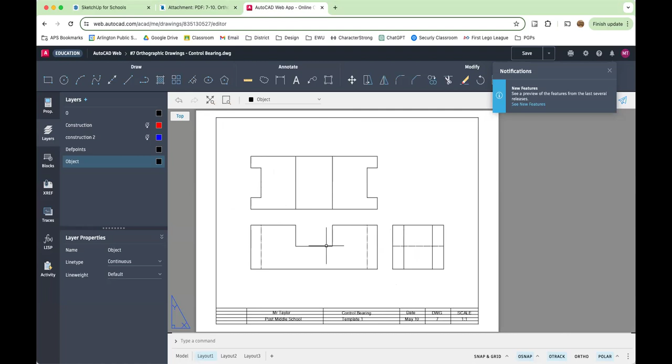We're going to do this together. Go back to our drawing template. Open it up. I would make sure you turn on all the lights to all of your views. And if you need to delete any lines in the middle, you go ahead and you do that. Mine's kind of offset here. I'm going to click on the zoom extents, and it's going to zoom me in where I can see what's going on. All right, we're going to draw the 3 views: front view, top view, and our right side. Let's start by going into our construction layer.

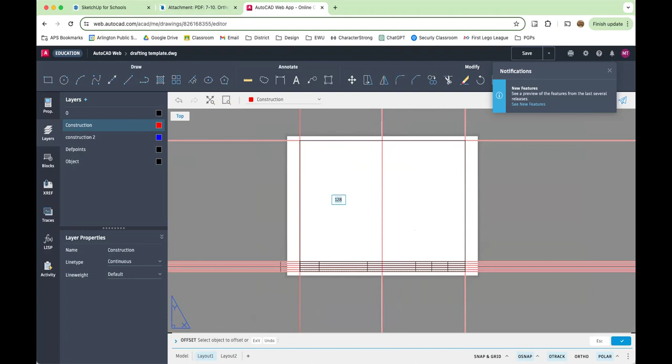The total width of our drawing is 44 plus 44 plus 40. That's 88 plus 40, which is 128. So 128 wide. Just to start with, I'm going to offset 128 distance this line this way. And that is the width. Now, we need to have a little space in between our 2 views, and I'm going to just pick an arbitrary number like 15. Let's just go ahead and click on this, move it to the right, and I'm going to type in 15 and enter, and that's going to give me a little space here.

To draw the right side view, the width of my drawing is 50. I'm going to click here. I'm still in offset. If you're not, you can retype your command. In my blue box, I'll just start typing. Don't click in the box, just start typing 50. So I got 50 wide. So our left side's going here. Here's our front and our top view, sorry, are going here. I have my little space. And then here's for my last view, the right side.

We want to get this centered right off the bat. Let's see what this distance is here. We're going to divide it by 2. We're going to move our lines over that distance. I'm going to use this to see where I'm at. Here to here is 64. Half of 64 is 32. So let's draw one more X line right here. And I'm going to clear my commands. Click on this line and select all of these lines.

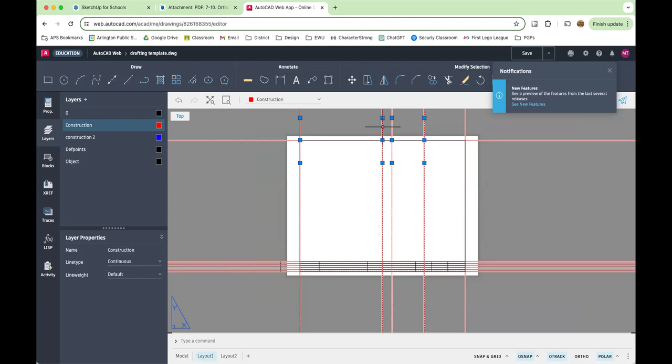Now I'm going to move. It says specify base point at the bottom. Let's just start here, and we're going to move across 32. So as we're moving across, let's type in 32. I will move those lines across. And now I have a space for my front and my top and my right side. And this is equidistant on both sides. So this is balanced and looks good to the eye.

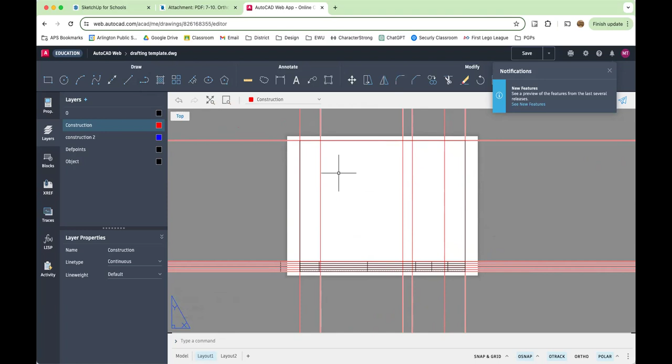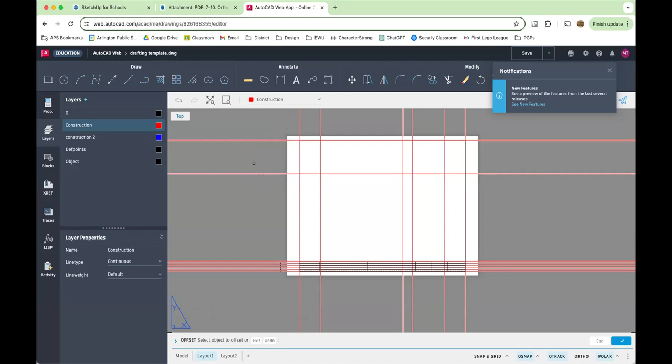Let's add some more X line, a red X line on the top. Clear your command. Add an X line in the bottom. Clear your command, hitting escape. And now we need to center these top lines for our drawing area. So we're going to be doing the front and the top. My top view is going to be 50. So let's go from this line, command offset 50, and we're going to offset this down 50. Now our space was 15 before, so let's click again, move our mouse down, type in 15, it'll go in that blue box, and that will give us another space. Equal spaces here.

And now we need to put a space for the front view. Here's our front. It's going to be 41.5 tall. Come to here, click on that line, move it down, 41.5, enter. Here are my 3 lines. Let's find this distance and divide it by 2.

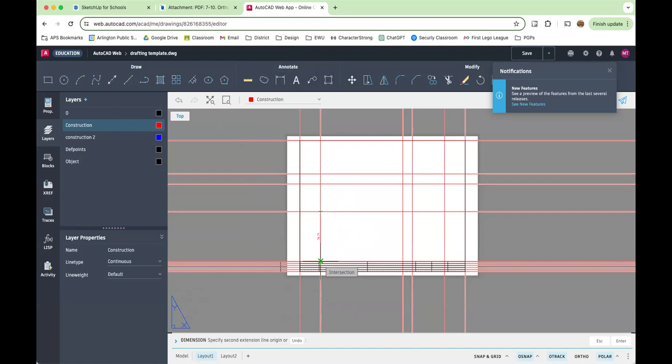Here to here is 74 or 75. Half of 75 is 37.5. So let's click this line and these lines, move them down, 37.5, enter. All right, now we have a space for our top view, our front view, and our right side.

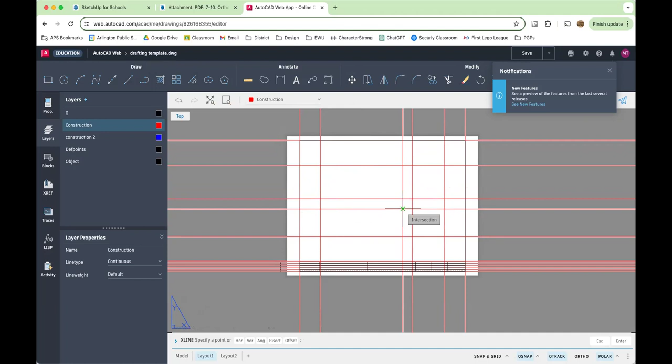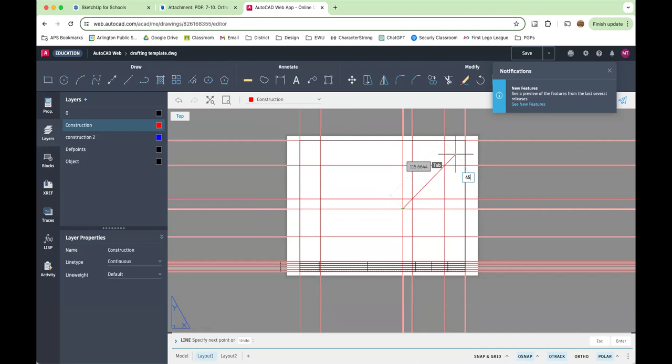The last thing we'll do right now, I'm going to take the X line, and I'm going to come to this corner right here. I lied. Regular line. Line. Click here. Move it up this direction. So I am in this quadrant. Press tab. Type in 45. Even if it says 45, type in 45 and hit enter. Where did my line go? Here. 45. Actually, this will exactly be 45. You can click there and leave that line there and just trust, okay?

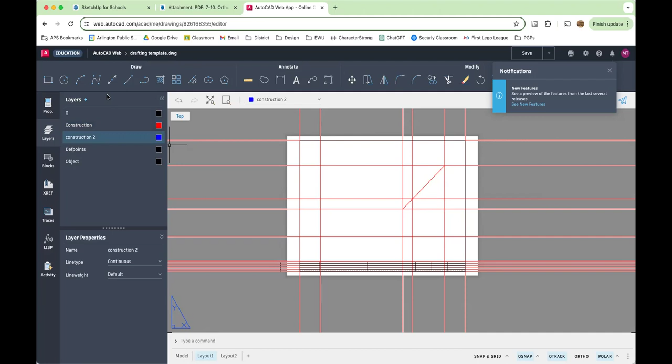Let's pick construction line 2. Pick our lines and let's just trace our boxes where we're going to be drawing inside of. So line there. Here's our top view. It's going to go in there. Our front view will go in here. And line one more time. Right side will go in here. All right, I've established this. This is a nice even box. And we are going to now draw our control bearing in these spaces.

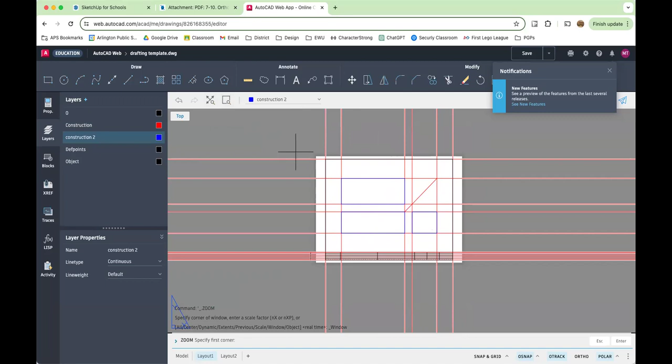Let's get zoomed into the spot we want. We're going to go zoom window. And I'm going to put that in there. Okay. Let's draw in our shapes by offsetting exactly where we want things to be. Let's come back here. Let's see our distinct shape, right? That's what we're looking for first. The first view we draw will give us our shape. So this U shape is going to be our shape of our object. This is our front, and we are going to draw this in here. So from here to here is 44, here to here is 40, here to here is 44.

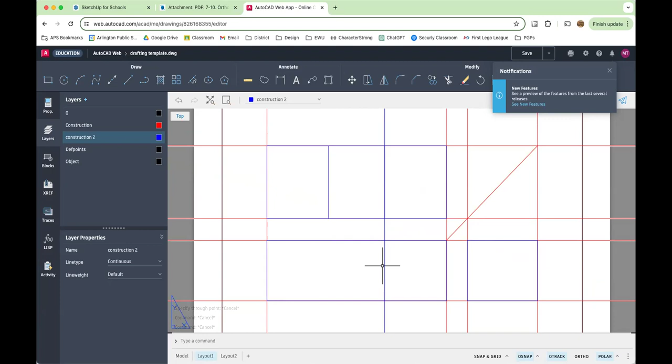Let's offset. Type our command as offset, 44, enter, click this line, move it in, click this line, move it in. Excellent. Now, don't ask questions, just grab another X line. We're going to extend that down because those lines are going to show up down here also, and that will make our life easier. You will see why in a minute. Switch to the object layer, pick line, and let's just double check that from the top, yes. Okay, we will have this shape. All right, all right, all right.

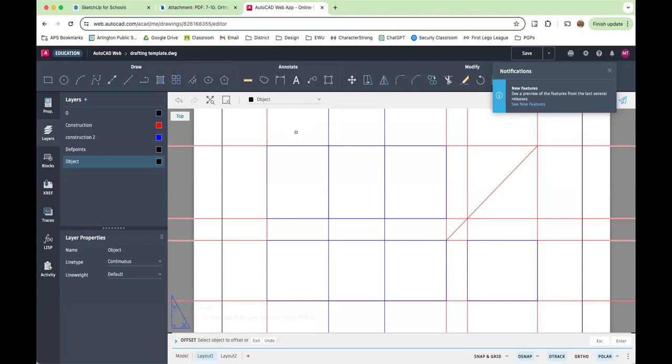Let's add these little things in. 11 here, 28 in the middle, and this is also going to be 11 over there. So let's just offset again. Clear your command wherever you're at. Click offset. Distance will be 11. Here this way. And here this way. Now back to our line. I lied. Look, we have to have this shape here. How far in? This is 10. Back to offset. Clear our command. Offset. Distance 10. Here to here. Here to here. Good.

Let's go back to construction 2 with our X line. We're going to want that line down there. X line. Anywhere over here at that line. And that line there. Let's extend these out because I have a feeling we're going to need them later. Extend that to there. X line. This will save us some time later. X line there. Okay. Now to the object layer. Now type in line. And we will draw our shape on our top view.

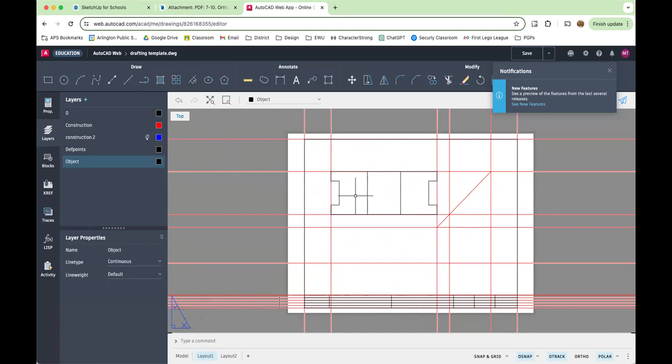So we followed that along. Let's turn out the lights on the construction layer to make sure it looks like what we want. Good, good, good. And now we have to add this line and this line. Turn on our lights. Back to our line. Good. Line goes here too. Lights out. There it is. All right, there's our top shape. That's what we look like. We're going to look at directly from the top. We will see those in here. Good. Let's turn our light back on. We're going to go ahead and draw the front view.

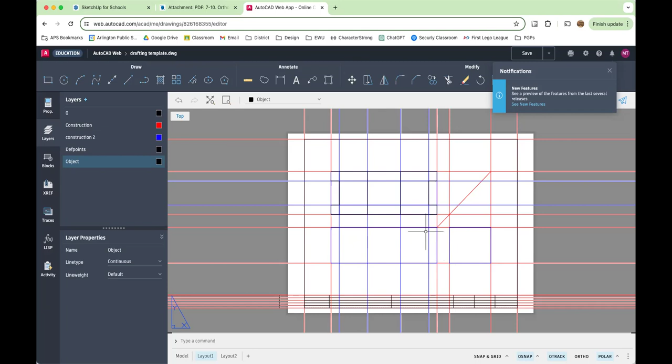Here's the front, this U shape. We're also going to have these hidden lines. What do we need to know that we don't already have? This is going to be a hidden line. This is going to come over, down. So I need to get this distance down, up, over, down. This is going to be a hidden line and all the way across. My distance down is 20 from here to here. I'll go back, type in offset. 20 is from this line down.

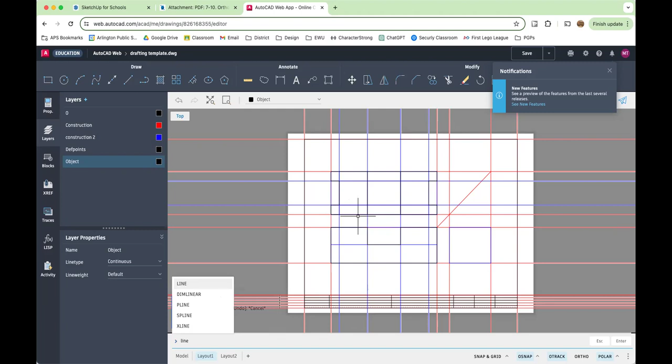And now I'm already ready to make sure I'm in my object layer. Select my lines. I can go all the way around here, down, over, up, over. And I need two more lines, one right here and one right here.

Here and there. All right. Now, these are hidden lines, and we need to come back and we're going to change all the lines that need to be hidden lines at the end to hidden lines. Let's draw our right side. We're going to have our, well, we'll look at the left side. The right side is the same. We're going to have this, and we're going to have this, and we're going to have this. We got 11 and 28.

We're also going to have this line in the back. That's going to be a hidden line. We look through here with like X-ray vision. This line is in the middle of our piece, and we need to represent that on our side view as well, 20 down. All right, pick construction 2. We've actually done all the work already. This line is going to be our hidden line. So X line, extend that across. And let's go another X line.

And if we extend this down, and X line, this line lines up with this 45-degree line right there, and extend that down. Like from the right side, we have that. We have the bigger one and the little one. We're going this across. Make sure in your object layer, type in line. I typed in X line, line.

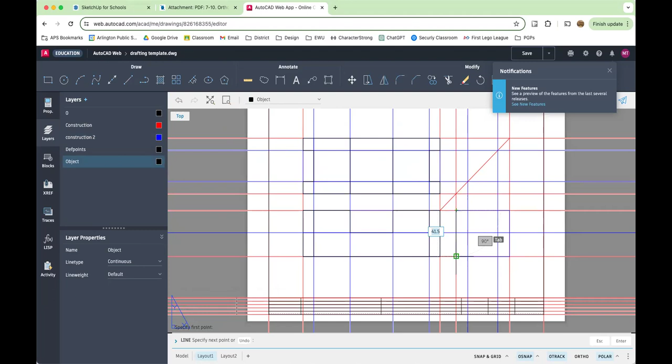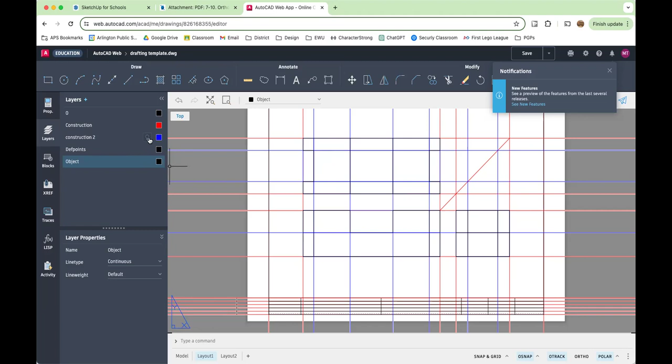Make our shape around the outside. Line. Straight down. Line. Straight down. Line. Going to be across. Excellent. Let's turn out the lights on the blue. Let's turn out the lights on the red.

Okay, we're almost there. We said this line we cannot see from the outside, right? This line, we have to see it with X-ray vision. And our other lines are these lines, which would be these here, if we could see them with X-ray vision and look through. So those are hidden lines.

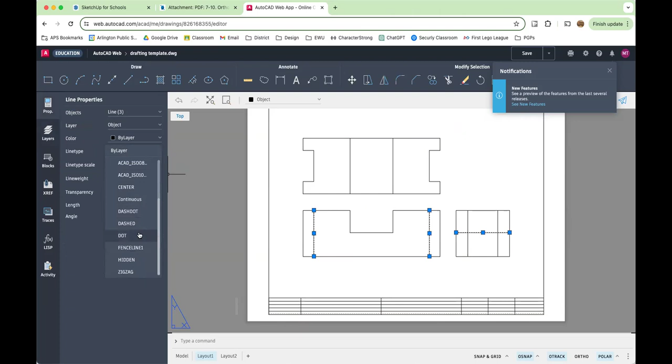Let's select all the lines we want to be hidden. Click on Properties. Come over to our lines. Line type. Click all the way down and select Hidden. Let's press Escape. And now we can see that those are dashed. All right, excellent. Last things are to write in the title block and to add some dimensions for ourselves.

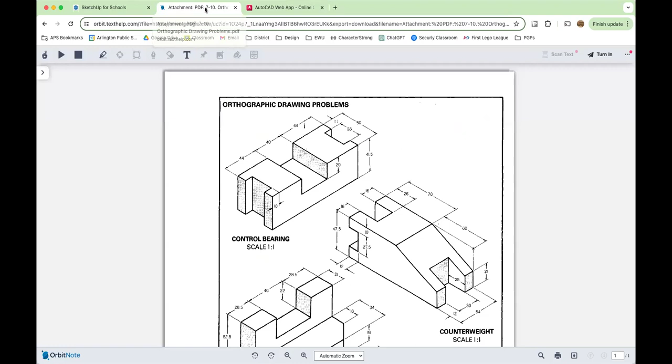All right, what information are we going to need? We're going to need our information here, total distance across. We are going to need our total distance tall. Now, let's also give this dimension here. Now, this is going to be a problem because I need to move this. I've escaped. I'm just using the regular mouse. Let's try to make this look as neat as possible. Back into my dimension. DIM is dimension.

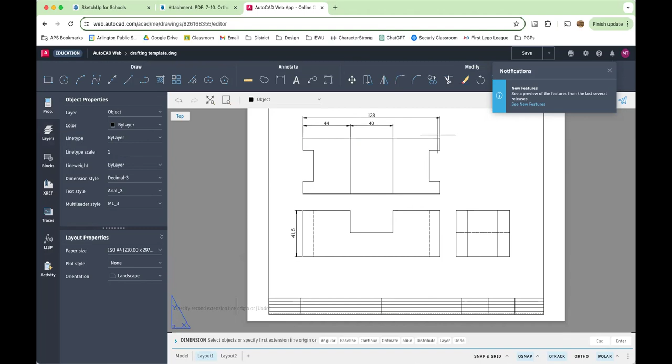We also need this dimension. If we have this and these two, we know what that is. We don't need to add that. This dimension, 11. Let's line that up there. Add this here. Oh, wrong way. DIM. I also need the total. 50. Let's make this look nicer by escaping out. Moving this back so it's in line with this.

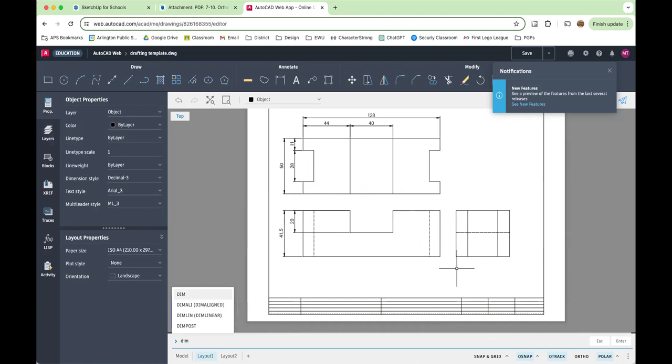And our last size is this. And that. What other dimensions do we need? We need this. Where will be the best place for this? Let's grab this one on the outside, DIM. This dimension. We already have that. This is this. That is that. And we have all of our dimensions.

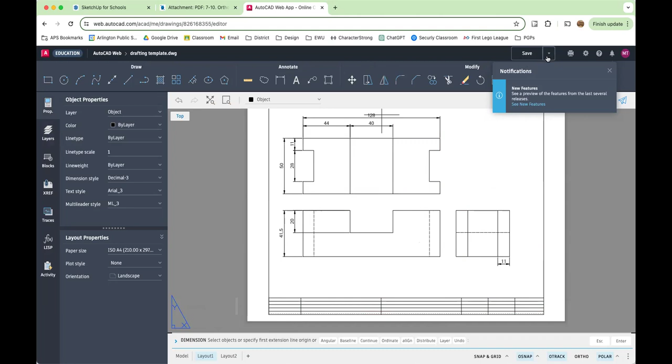Excellent. Now, probably should have saved this earlier. You're going to want to click Save As. It's going to be titled Orthographic Drawings number 7. Put your name on it. It is called Control Bearing. And click Save. Better click Save As and do that. Number 7, Control Bearing. Your name. And I'm going to put dim because I got dimensions on this one. The other one I didn't have dimensions on.

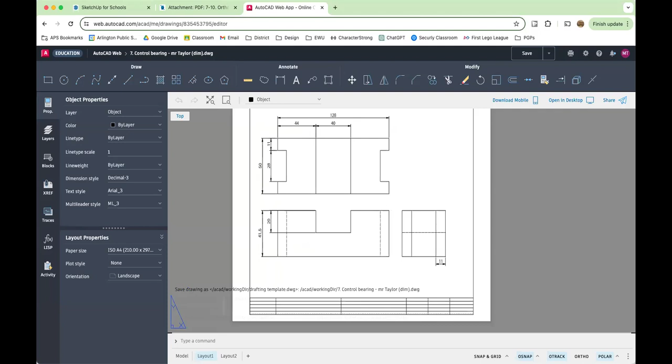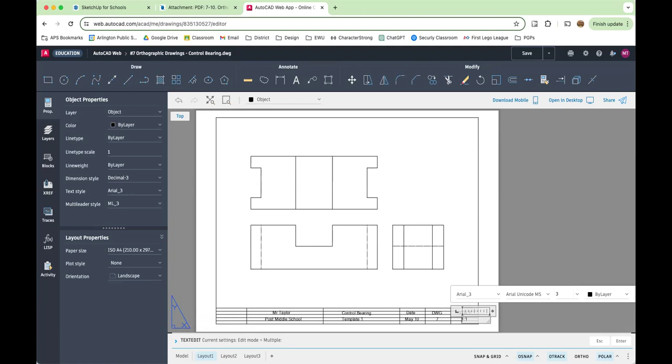And I'm going to go back out and just remind you about the title screen. Here it is. Here's what you should have in the bottom. You probably have another one that already has information in it. These are 3 apart, remember? This is 30, 75, 75, 25, 25, 26. If you have other information in here, you can click on that and you can type Text Edit. And when you click on that or type in Text Edit, you can change what you want it to say and then click on the check mark and that will change.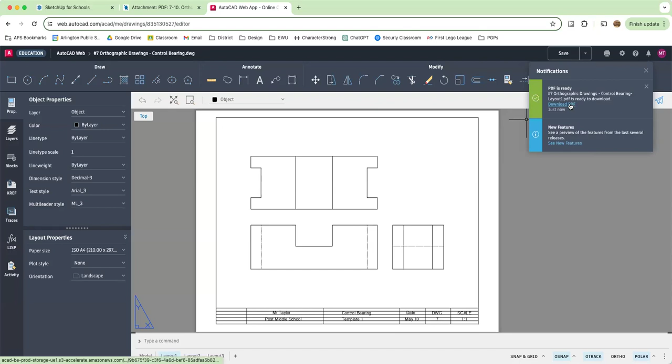So you're going to want to change the scale maybe. If it's 1 to 2, some of you might have, it should be 1 to 1. The drawing number, this is drawing number 7. The title is Control Bearing. Change the date. And now you should have the right information in here, as well as your dimension drawing. Remember to finish by clicking the print button. Plot your PDF. When it finishes generating, you can download it and attach it to your file. Download PDF, go back out, and attach it to your control bearing assignment.

Now, I've got one more of these that I haven't loaded yet. There are 10 total. You only need to do 9 of them before the end of the year. So you can choose between finishing this one, which is actually fairly difficult. You can see it's got these star shapes, or you can just keep going and maybe skip number 10 because number 10 is the most difficult of these.